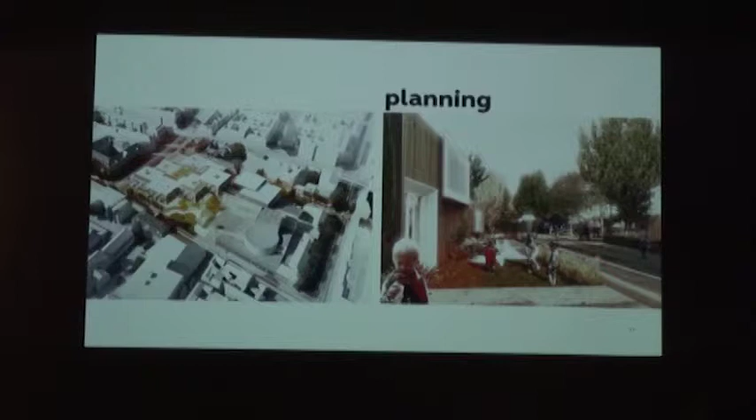And then we do planning. We do some very big scale planning projects in different places in the world. But here it's from Norway, where we're doing a neighborhood center, a small place, and then we're doing some social housing in the northern part of Denmark, where it's about taking the whole area into consideration.

We work a lot with sustainability. We started this 8 years ago in the office, and now it's a separate department. We focus on daylight and energy, because for us it was difficult to take the whole package of sustainability in. It means we are using daylight the artistic way in one sense, and then with a more technical and research-based approach on the other hand. And with daylight we have a strong tool to do a lot.

The reason why we're doing energy - I don't know if it's so important here because you have so much oil, but in Denmark we don't have that much, and energy is terribly expensive. So saving energy is really saving running cost, and you can add that to capital cost for a project.

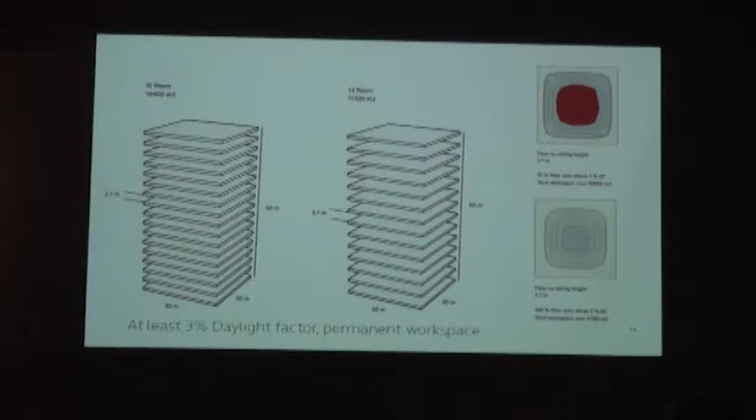This is a diagram I did for a contractor in Holland. They were asking for 16 floors, about 14,000 square meters, with workspaces in the perimeter of the platform, 30 by 30 meters. Quite simply, by looking into our research, we could see that by utilizing the whole platform - meaning you can have workspace all over - we could reduce the number of square meters by having 1 meter more floor to ceiling.

And this all comes out of a rule that is more and more being executed all around Europe, that says you need, at the moment, 2% daylight, but in the coming new rules, 3% daylight on a permanent workspace. That means at any time of the day, the daylight represented outside needs to have 3% of that inside on your workspace. If you can't prove that, it cannot be a permanent workspace.

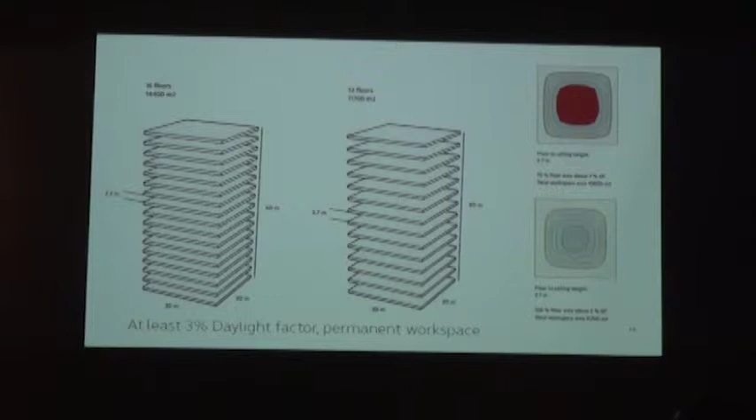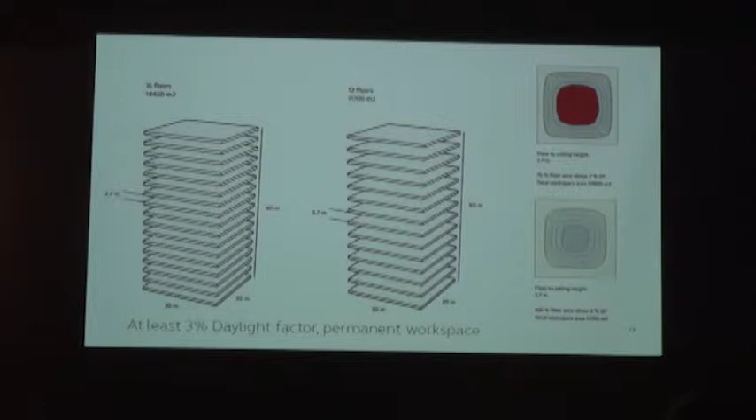I know for people working in cubicles and stuff like that, this is not good news, but it's a reality in Europe. It means that for a lot of organizations, universities, or pension funds owning this kind of building, you can have buildings that are totally outdated - they cannot be used, they're not efficient anymore because they cannot provide the 3% daylight as they should within the next year. In 2015 these rules will be implemented, and I'm sure it will also come to this continent.

We have a work method in how we do stuff, and the reason for that is we have to be able to communicate with clients and users in these processes when we work together, but also because we have so many people sitting in different positions around the world, so this is important. If you look at it, it's terribly banal, and it should be like that.

We have a data collection and analytic exercise, and then we put in what we call a strategic concept. If I were to do a competition for a university building in Europe today, I would get so many pages in binders talking about what this building should do. If I carefully read all of that, it shows very precisely that you cannot build anything after that, because it's counterproductive, it goes in all directions. That's because you have so many user groups, management, facility management, and they all have a say, but nobody can go in and make these prioritized choices in that material. So what we do is boil it down to one page, or let's say 5 paragraphs, that represent what this is all about.

And if it's not a competition, and often it is, because 85% of our jobs come through winning competitions in our firm, but if we are with a client, we present that to the client and say, you came with all these binders, but in reality, these are the 5 most important issues to be solved with this design.

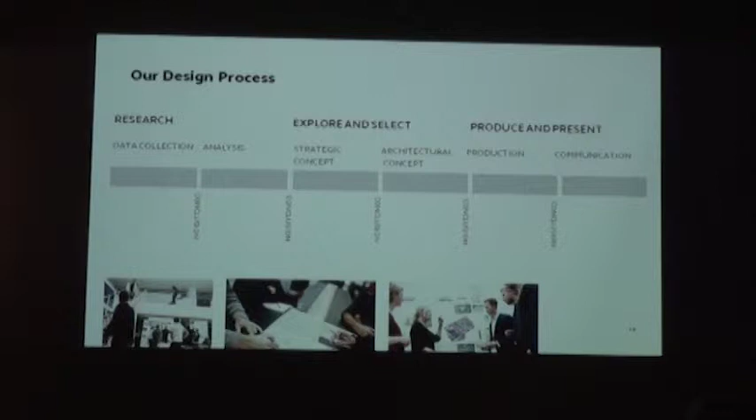Yeah, now to the projects.

This is a university building we opened yesterday in Denmark, a faculty for economics, for studies in economics, placed in the southern part of Denmark. The strategy here has been to make a building where you come as a student, the first day when you enter your institution, and you get a view over the whole offer. What is the offer they can give me? What can I do here?

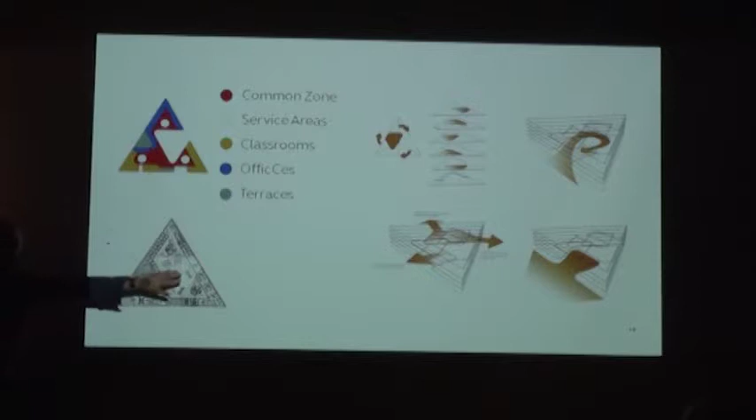So by coming in at one place and having a kind of revolving or turning atrium, we open up clearly. So you come in here - this is just a couple of months ago - come up, and you follow all the way to the daylight. So there's a progression as you come up.

And this is all informal study places. We very much divide our spatial organization between the formal learning and the informal learning.

There's 3 steps in learning. One is to go to a lecture hall, then you go out and discuss with your fellow students what you saw, and the third step is the possibility to activate it, to go back and explain what was happening. We are deliberately creating these informal spaces, because in a brief you always get the formal spaces but never the informal spaces, and we have to fight for these square meters. So we have this kind of space - you sit here today, this is formal, maybe not learning, you could say entertainment, but it will then lead to learning.

And when you walk out there, you will start to discuss something. You need a place to sit, an area to be, and this is important. So coming out of the lecture hall, you can come to these more intimate spaces that interlink with the bigger space, which interlinks with the very big space going all the way to the main entrance.

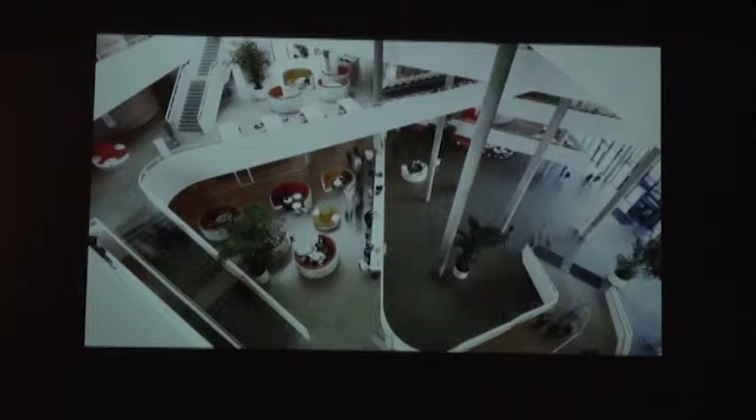You see how you can look down through this connection. We are also creating outdoor spaces.

Climate change has been good to Denmark, at least for the summer. We have longer summers than before, and people really enjoy getting out. In the wintertime you also need to get out to get some daylight, basically.

Then the facade. This is a very sustainable building. We are using approximately 30 kilowatt hours per square meter per year here, which is a very low energy building.

The solar protection on the facade is a system of louvers that can open and shut automatically. So the building changes as the sun turns. As soon as the sun is away from a facade, it opens up totally, then closes down and opens again. You can of course oversteer that to get this kind of motif.

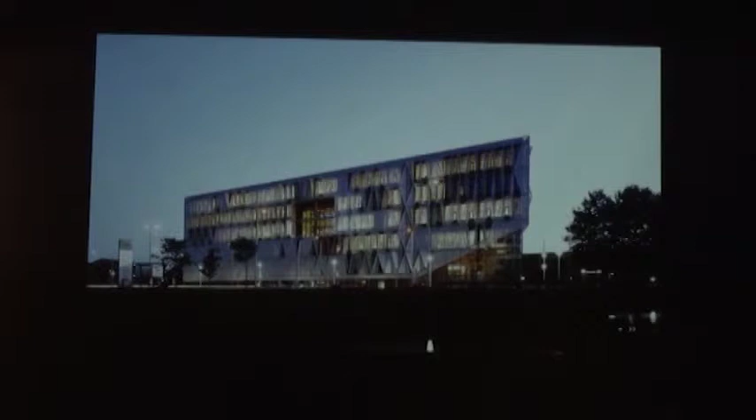This picture is a little false because it's made for the photographer, so they shut some and had some open to make this pretty picture. In reality, the facade will be more or less closed in one direction if the sun is on.

Another project is in culture, a very different scale also. 16,000 square meters, what is that? 160,000 square feet.

Situated on a green field outside the provincial city of Aarhus, it's for archaeological findings in the ground. In the competition, we worked with the idea that you just open the lid to the excavations down there. It was a very simple scheme, and I think you will like this simplicity. It's all attached to a very big mansion, a farmhouse or farm in this area, which is also a museum, and this is on top of a hill.

So you overlook the sea, the Baltic Sea, leading to Copenhagen. Inside, it's all about how you will be slowly moved into the earth, into the excavations. We're using a lot of daylight up top, and as we go further and further down, it gets darker and darker and more focused.

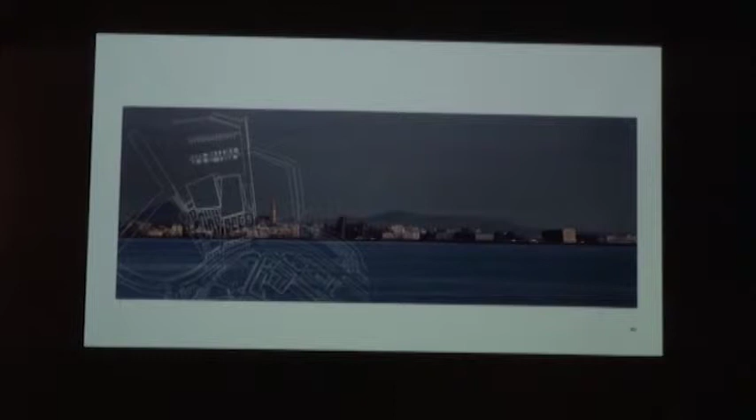This is Reykjavik. We're placed here. It's an extension of the city of Reykjavik to a harbor area, so it's also a regeneration project.

And then the rest of all of this is kind of public accessible areas. They're not programmed in reality, but they are the areas where you can invite people in without tickets. Because this idea that culture becomes so expensive that you can only pay €100 or $125, even more, maybe $150, to get in for an evening - that is a lot of money, and many people could have good use of these places without that kind of fee.

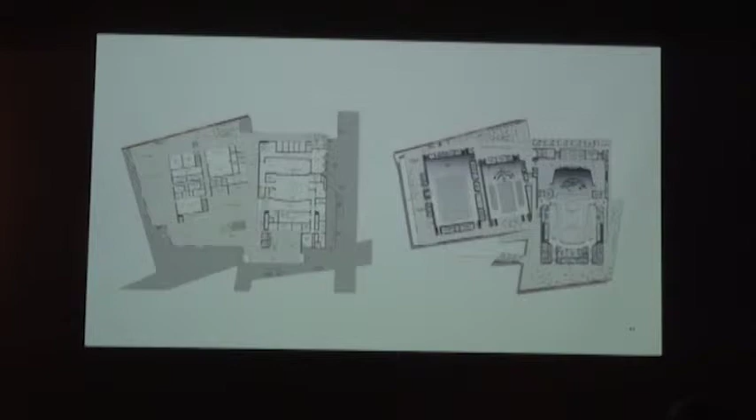But it also somehow gave us an opportunity to work with this extreme situation design-wise. You can ask yourself what kind of building would resonate in such a climate or in such an extreme situation, because it also goes the other way. In the winter time, the sun comes up like 10:30 and it goes away like 1 o'clock, which means you have a relatively short day, at least if you want to be up that day.

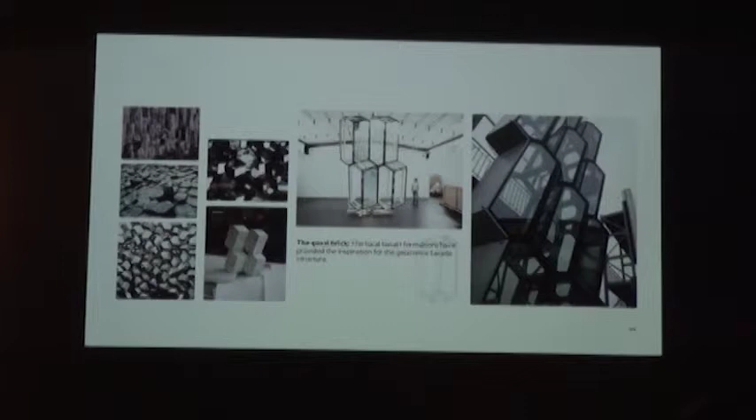Inside, we created these very big and lush spaces where the daylight kind of floats in. You see the different colors on the glass. We work with clear glass, colored glass, and mirrors. It's a kind of transparent mirror, but it is kind of mirroring.

And that facade also changes totally with the sky. The reflections of the sky and the colors go directly into the glass as such. And in a way, the building almost breathes like a human being over the day and over the year.

This is a kind of front facade shot, and you see it creates this very intriguing pattern, interesting because it changes due to the sun angle hitting it.

We worked a lot with the opening, as I talked about before, the invitation to the city. So at ground floor level, we have a lot of doors opening up, and at daytime, you can just come in. This building is used for concerts, theaters, computer festivals, car exhibitions, folk dance.

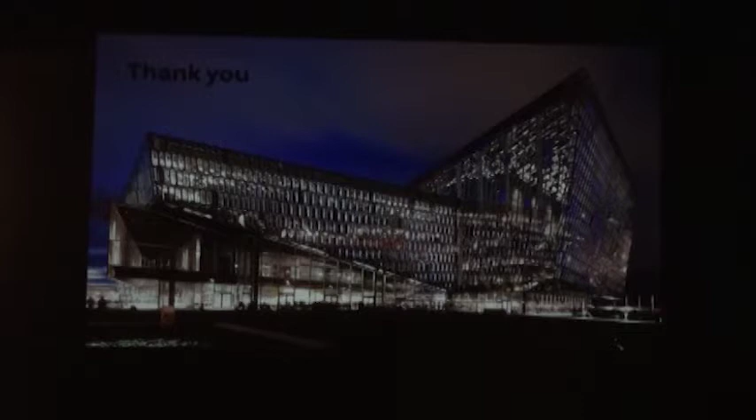Coming to this time, September, you start having these long afternoons, and the building totally changes its appearance on the outside and the inside. Then in wintertime, it becomes a beacon. It reverses totally—it becomes a destination in Reykjavik you want to go to, because it's almost dark 20 hours a day.

Last year, in 2013, we received the Mies van der Rohe Prize for the building. Of course, we are immensely proud of that. Thank you.

Thank you, Louis. It's a difficult building to come after, but I'll try. The buildings we do are a little different, but the connection between me and Henning Larsen is that I had my formative years in Henning Larsen's office, working with Louis and others who came out of the School of Aarhus. We were together in the first five years in Aarhus, and afterwards we worked with Henning Larsen.

So the office is very important to me. I formed my own office 15 years ago, and we are 30 people, which is not as big as Henning Larsen. We also do smaller buildings, mostly culture and educational buildings, but also some commercial and workspaces. Right now we're doing the global headquarters of IKEA.

I guess most people know IKEA. They're doing a new global—we're not supposed to call it a headquarters, because the headquarters will always be in Älmhult—but it's in Malmö. It's a global meeting center and workspace.

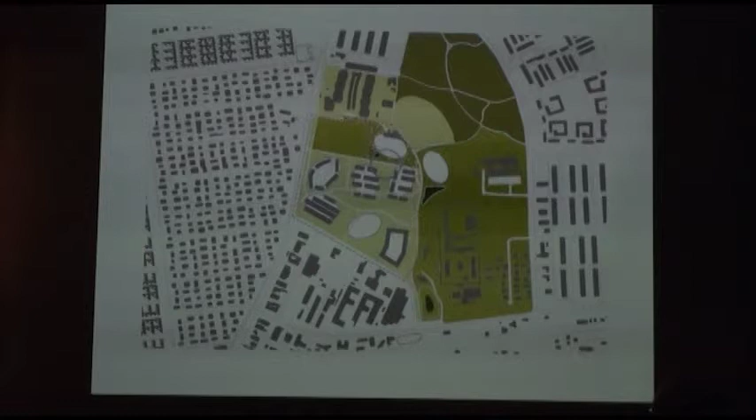This is a very small project, in a suburban setting right outside Copenhagen—a small neighborhood center, a tiny cultural house, in this kind of social democratic setting. As you can see, there are lots of detached houses but also social housing around, and in these areas they have a tradition of having these small cultural houses.

This was a competition, and the development was quite new, so there were no end users yet. Part of it was to rethink the program for a traditional cultural house, which was mainly made as a space you could rent for parties on a Saturday evening. By doing that, you would actually privatize these small cultural houses that are supposed to be for everybody and create activity in the area.

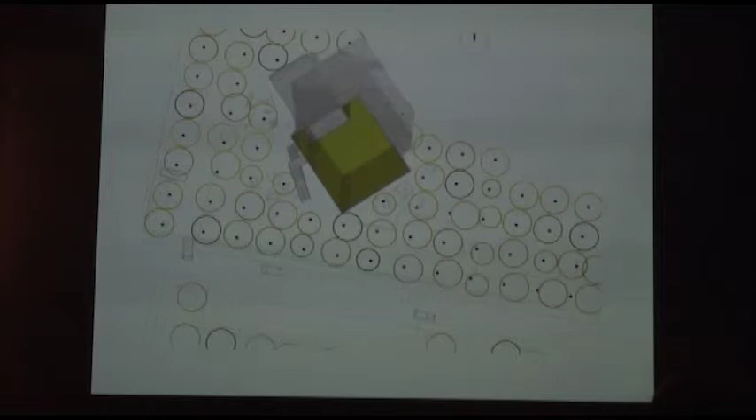The site we were given in the competition, as you can see, is quite small, and the idea was to create as much activity during the day as possible in this small house, by stacking all the activities and connecting them with a staircase in the back.

You could use every space separately, but you could also combine them. As you can see here, all the activities we imagined could be going on here, from skateboarding to making dinner for your friends and bringing it back home in the industrial kitchen at the bottom.

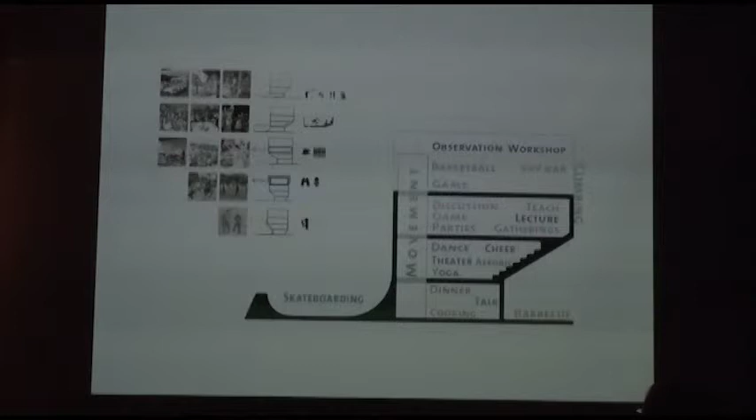You can also open that up as a kiosk, and you could be outside in the summertime. We have a small auditorium, a small multi-purpose space, and a basketball field on top, which is also an outdoor bar mainly in the summertime.

Of course, energy is a very important issue in Denmark, and this was 2008, when the requirements were strict but not as strict as now. We wanted to reduce energy consumption by 30%, but we actually halved it down to 40 kilowatt hours per square meter, which at that time was quite low.

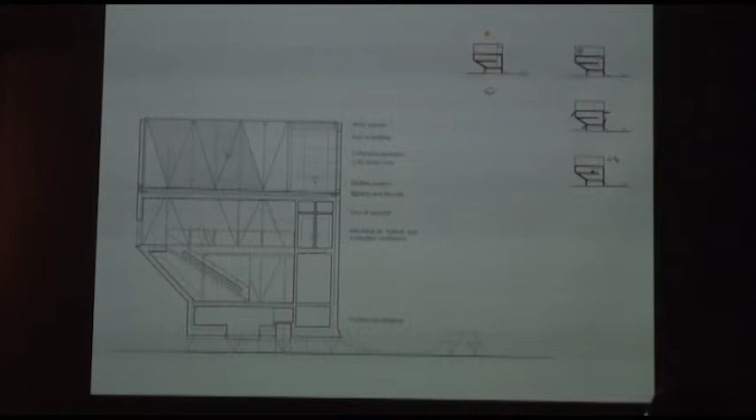We did that by using all different kinds of technology, but also by being low-tech, having natural ventilation controlled by sensors, geothermal heating, and so on. So this is how it looks like.

It shows the stacking of the activities. It's aluminum cladding, which is also a passive solar screen from the big windows—some is perforated and some is not.

As you can see here, you have the staircase leading to the first floor, to the auditorium, which you can combine with the multi-purpose space or detach. You could also enter on the ground floor and, with a small staircase or an elevator, get up through the houses. And this is the daytime view.

We have this climbing wall here that is very much in use with instructors, and we have this skateboard ramp, and the basketball field. And you have, of course, the indoor activities.

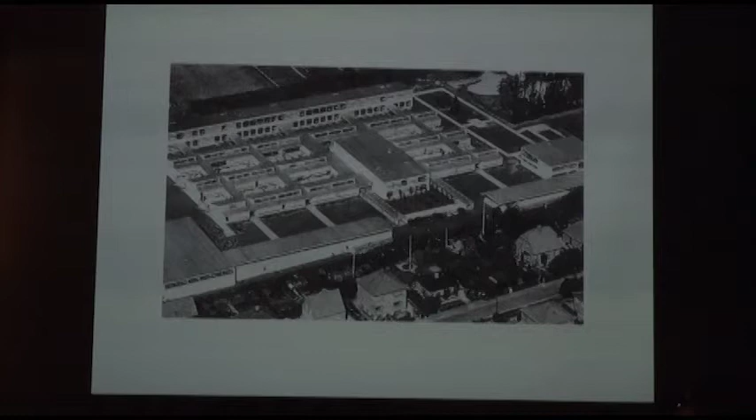This is the full school. As you can see, you have these classrooms with the small courtyards in front. Actually, you have a twin classroom and a twin courtyard, and it's kind of very structural—you can continue this structure forever if you want to. And it's all connected with these hallways only going in one direction.

You have the specialized classrooms here in the back, and you have the central hall, which at that time was used mainly for gatherings. In the morning there was a tradition - I don't know if you have this here - but you would meet in the morning and sing a song, then go out for your classes. You don't do that anymore. So this full space was kind of empty, and in a way it was an empty heart in the school, with no activities.

The reason we got this assignment was that in this municipality they were changing all the schools to facilitate new ways of learning, which is much more project oriented, and also in need of a lot of different space types. You need to be able to go out with a group to work together, or to work individually, or with larger groups. In that sense the school was kind of old-fashioned, because you only had these classrooms and the specialized rooms.

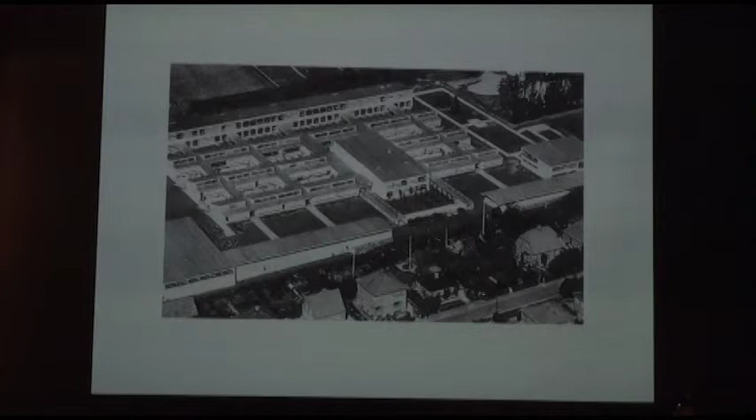So the municipality worked with two architectural firms to try to restructure the school, by covering some of the courtyards and changing the whole structure, which was kind of a tough way of working with this beautiful piece. Fortunately it was federally listed, so the cultural minister in the end vetoed this refurbishment or reconstruction of the building. Since the client wanted to use it, they asked us if we would like to try to look at the school and, by doing less, still facilitate the new ways of learning. I think we were very lucky to get this assignment, and we're also very intrigued by getting these kinds of assignments. We like challenges - that's what makes us happy, you could say.

So the initial work was mainly to try to reprogram the school, to see if we could find a way to use the same structure but in a new way. What we initially did was use the after-school facilities, which is part of a Danish law - you have to provide after-school facilities for children until their parents are able to pick them up. By reusing the same square meters inside the school and in the after-school facilities, we could somehow get more square meters altogether. By opening up between the two classrooms with a sliding door, making these kinds of small changes, we could still use the same structure but in a different way.

Then we moved the library, the mediatheque, down into the assembly hall to recreate the heart of the school. And then we suggested that you could actually make a supplement to the very strict structure of Arne Jacobsen, but doing it underground.

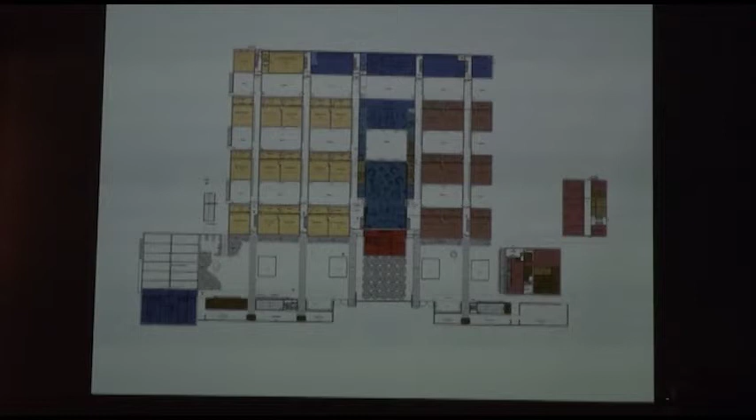The idea is that you have two parallel walls that make a supplement. You don't change everything, you only change something, and by doing that you can add new spaces to the old structure. So this is the old schoolyard in '56, and by defining the asphalt or the ground as the limit for the listed building, we worked with overground and underground structures. If you're on the other side of the listed line, we worked with the Arne Jacobsen proportioning and also the detailing.

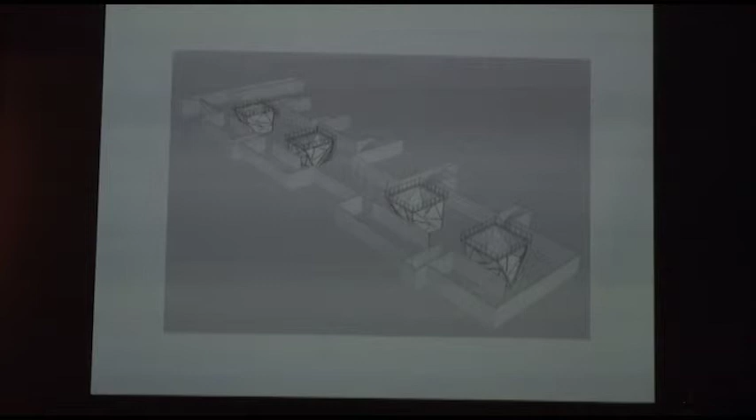So this is half a courtyard in the proportion and also in scale. Then you can twist that geometry when you go underground, because underground you're not on listed grounds anymore. By doing that we could create this underground space, which is much more fluent and has a totally different scale than the Arne Jacobsen structure. By adding these specialized facilities, we could also save the old building from having ventilation ducts and so forth, which really isn't possible in this kind of very defined structure that he did, and also the detailing.

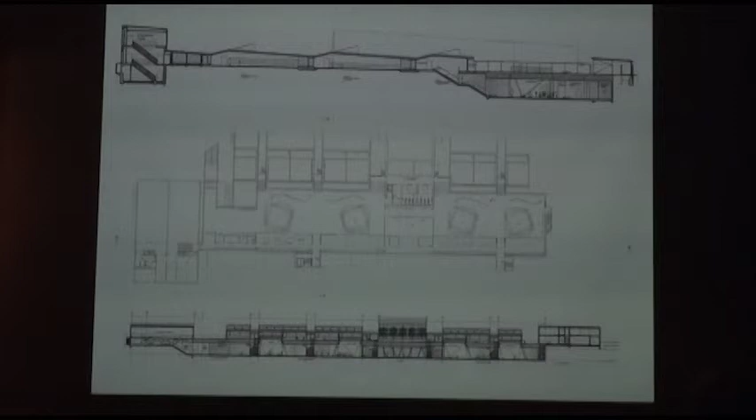So mainly the underground plan looks like this: you have this very large fluent space around these light courtyards. You have these spaces that require ventilation on this side, and you have glass walls that can open up to the big space, so you can have this kind of large laboratory or project space that you can use together with these specialized spaces. And here you have the sort of famous Arne Jacobsen hallway, which is a classic architectural move, you could say, where you really have suspense and you open up the spaces in this rhythm. Then we connected that to the new extension underground, and by doing that we could also connect the school this way.

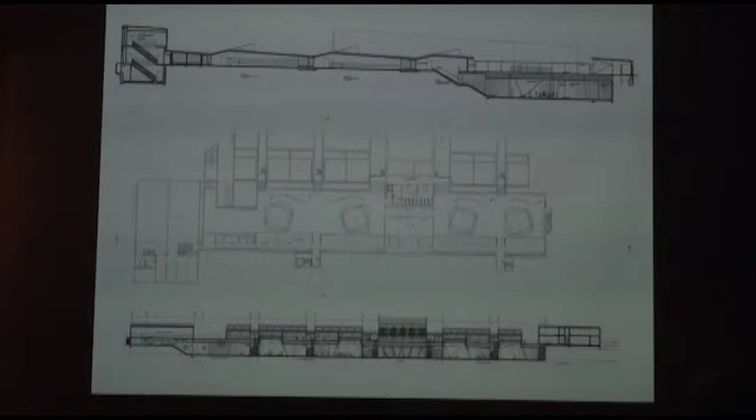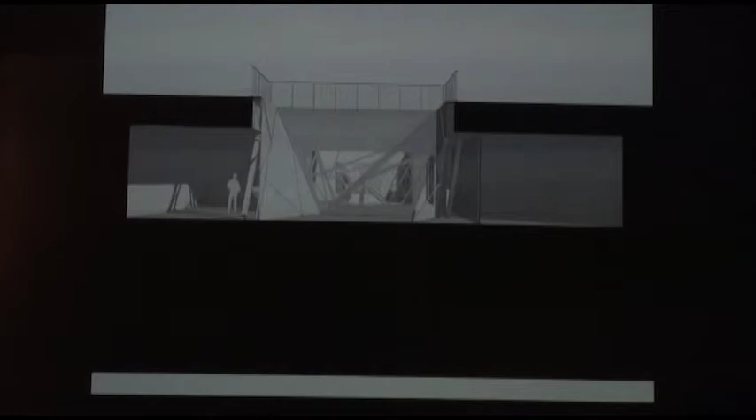Of course, it's difficult to build underground and still have daylight. You heard Louis talk about daylight, a very important thing, and the parents were very nervous about putting their children underground. So our main strategy was that the underground building should be much brighter than the building above ground, and we should have this feeling of going up into the sky when we move down. So we studied light in models in a light laboratory, working a lot with reflecting surfaces to ensure we had enough daylight down here.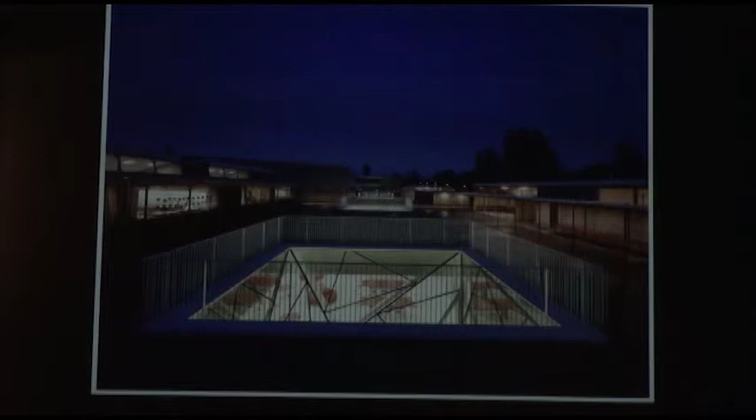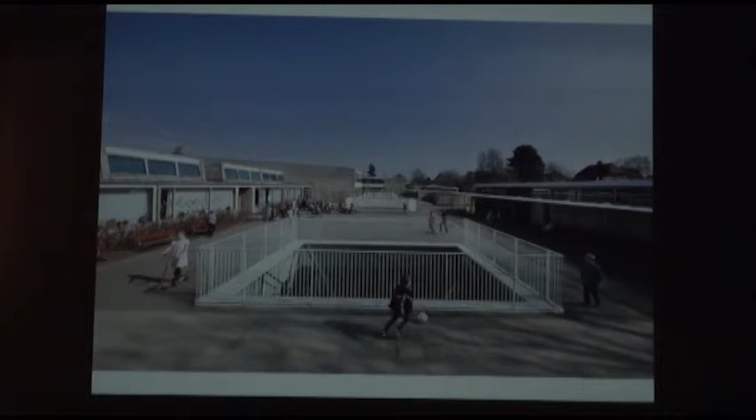The restoration is, of course, a whole other story of the existing school, bringing back the old colors and so forth. When you move down, as you can see, you have these classical proportions, and as you move down you get a different kind of space.

Inside, we used white concrete to reflect as much light as possible, and it is very bright down there. The main construction is steel, with secondary construction for the windows - and here we're looking up towards the existing school.

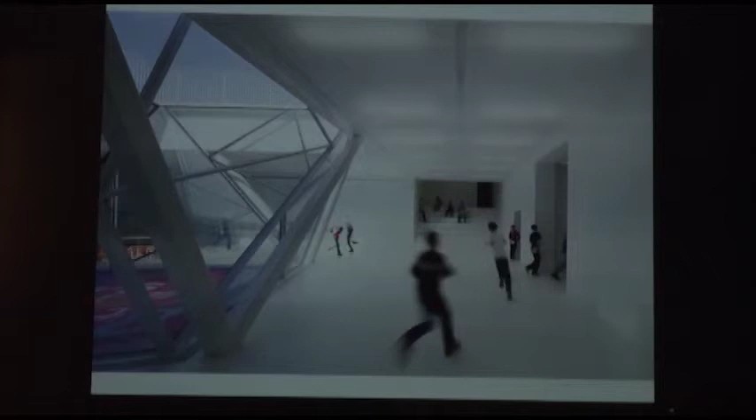All the hallways are connected with these small auditoriums or stairs, so you can have informal lectures with the children, and then work in the bigger space - or you could work inside facilities like physics, chemistry.

There's also a physical education space, a biology space, and a school kitchen in these smaller spaces. You can open them up and work like this guy sitting outside studying, while mainly the lecturing happens... well, I don't know the word in English.

So you use these courtyards for experiments - especially the physics class used this a lot for different experiments.

A school kitchen for everybody to use during breaks, and in the afternoon you can come down here and use it for project work too. If you're studying Chile, you can make empanadas here, or whatever. So the idea of this big space is more like one big project space, one big laboratory for the whole school to use.

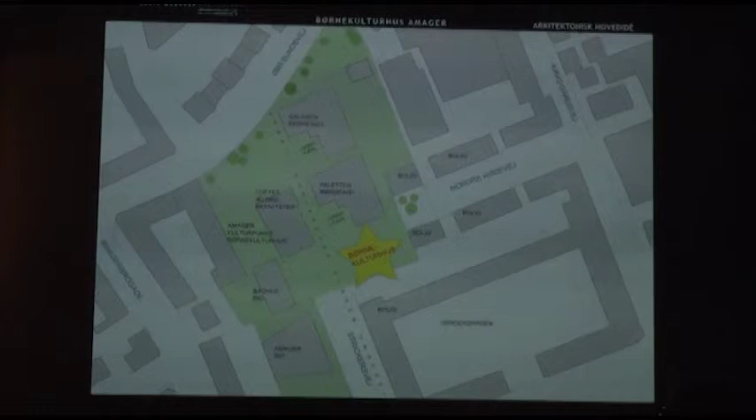This is a site actually under construction. The border of the site was here, and here you have the rest of the cultural buildings. Here's the cinema.

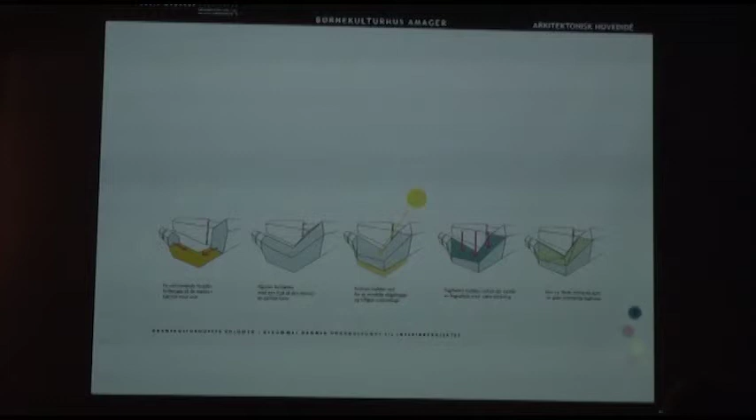The idea was to get as much square meters out of the site as possible, but still taking care of the neighbors. So by connecting the two very different scales from the 6.5 story building and the 2.5 story building, and pushing down the middle of the shape to ensure we could get sunlight and daylight into the neighboring buildings, we created this kind of envelope that could contain the children's culture house.

It's a very complicated house, spatially, and the idea is that you can always orientate yourself when you get into this low part, and you're able to see all the activities going on. By doing that, you can make a choice and choose to go to either side.

One of the sides here is mainly workshops where you do dance or art, and they're enclosed acoustically, but you can always look from one space to the other—so you can see from this space up here all the way down to the entrance floor.

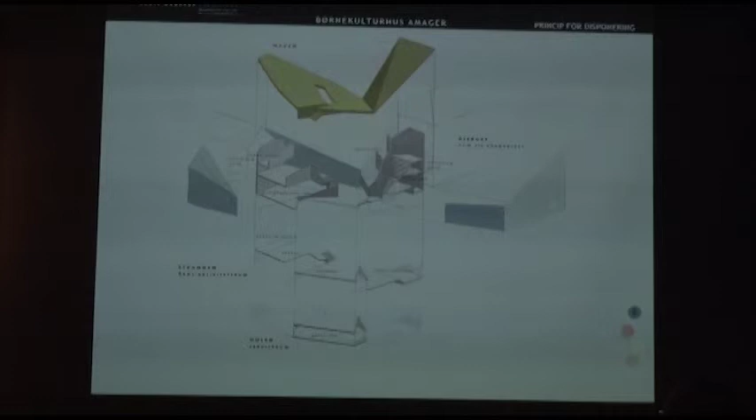The other part of the building is more open. It's for the performing arts, and you have a performance space down here that's dug down half a story. You have an open cafe here, and smaller spaces for the children further up here.

This is kind of the inside. Everything is connected on one side here, called the mountain, by a big staircase, which is also a gallery where you can exhibit your work. And you have a multi-purpose workshop here, plus two smaller workshops where you can either do dance or art.

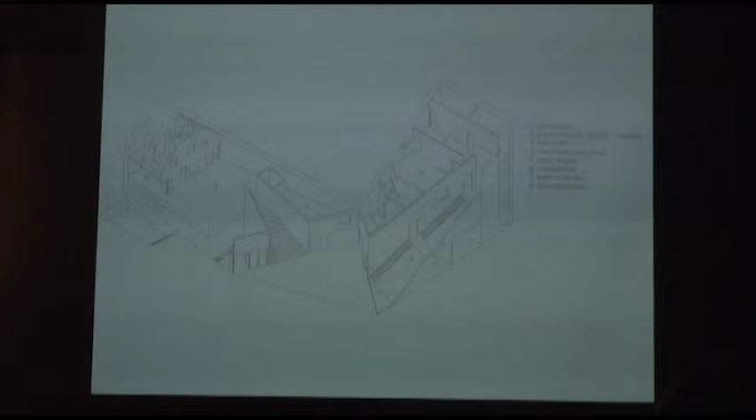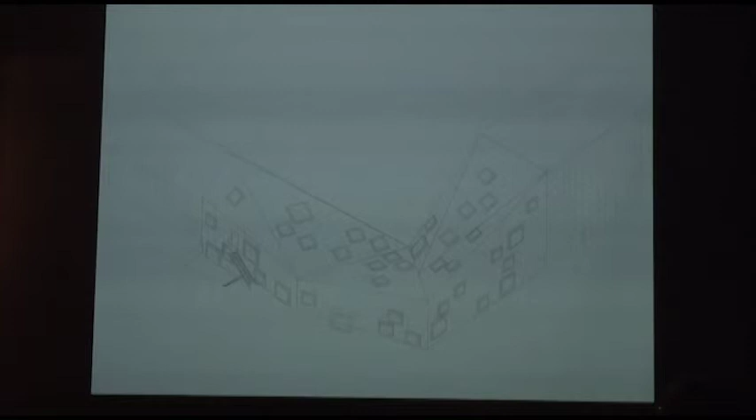It's all enveloped by the same skin, so you have these deep windows, which are kind of spaces in between inside and outside, towards the sky, of course, but also towards the outside world. The idea is that these deep windows can be inhabited, that the children can change the inside of it and actually inhabit that for a while. So you can sort of privatize the skin in between inside and outside, but only for a while, of course.

This is the connection. As you can see, there's a lot of buildings around it, so it's difficult to kind of overview the whole building. Here's the roof line going down into the workshops, and here you have the kind of scale connection between the existing building and the new house.

Here you have the deeper windows, and you can see this is actually the children's work. You can take the lighting out, change it, and put it in again.

This is called the beach—it's kind of the entrance space, which is changing all the time. You can kind of shape it. If you have a project here, a project for the whole house, you would kind of shape this space. So this is changing all the time, but mainly it's kind of an empty space that you can fill up with different stuff.

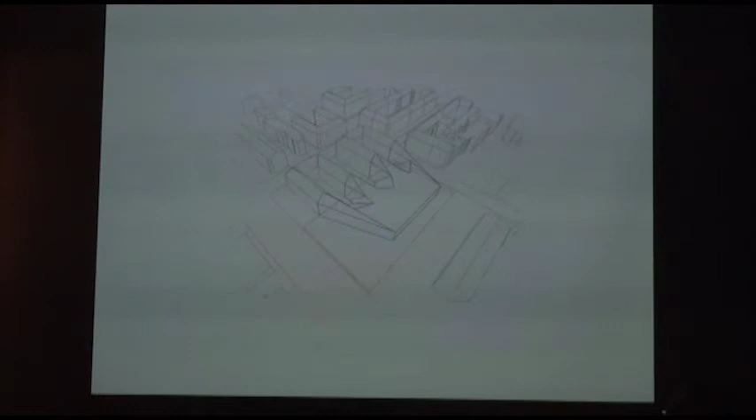So what we did was to define the field and the program. This is the handball field, and the gables that we characterized as being very special. What we did was to look at the light conditions in these backyards. This is west, so to ensure that the western sun could get into the backyards, we connected like this, and then we merged the program and the gables.

By doing that, we got this three-dimensional building site. We could say you have this kind of big covered field, big covered space that you can use for many different things. So it's mainly kind of a covered outdoor space.

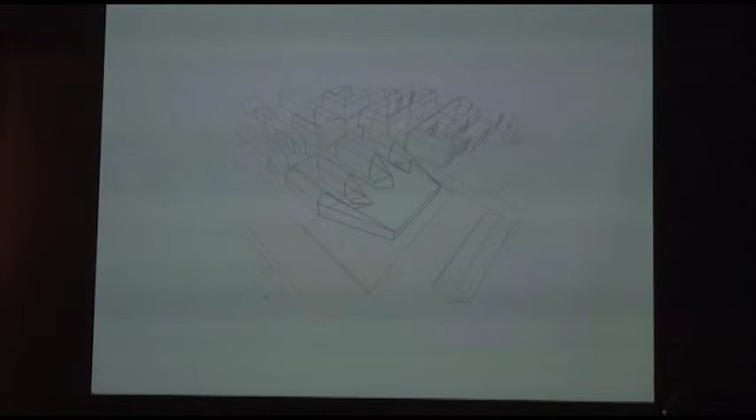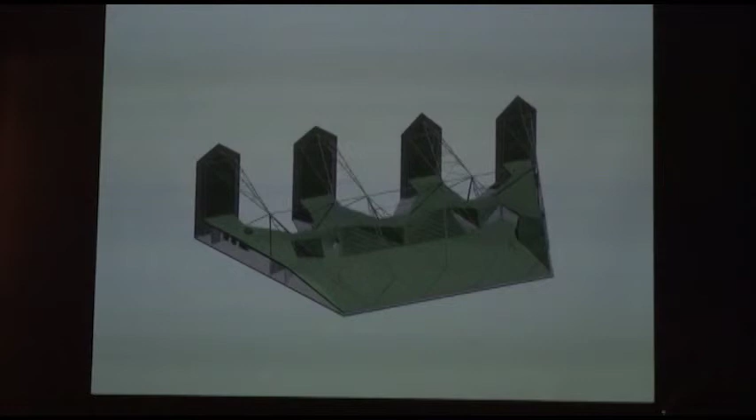This is the field underneath. The feeling of having this outdoor space we enhanced by folding up the grass, and by doing that you had connections to these surfaces here and to the big field here, and you could provide for enclosed facilities underneath.

Polycarbonate is a nice and very inexpensive material, but also it's transparent. We found it was very important that you had this. If you had a covered field, you also have daylight. Nobody wants to go into these sports halls that have artificial lighting, especially in the summertime. We want to enjoy the long evenings.

So this is another project, but the qualities of polycarbonate are very obvious, with the transparency and the shadows. You can see what's going on behind it, and you can see the light inside it.

This is the primary construction in steel, which is minimized, as you can see, and the secondary construction in plywood, which is also quite inexpensive. And here you have the cupboard.

We had a lot of fights with the sports end users because they were used to daylight being a bad thing in a sports hall, since you could get blinded. But of course, since you don't have much contrast, you don't get blinded. So it's actually possible to do sports in daylight, as you could do outside.

But also inside you can do that. And this is how it shows in the evening. So you have this kind of attractor, you could say, in the street. It's open from 8 o'clock in the morning until 10 o'clock in the evening, and in the winter time it's quite important that you have this kind of attraction.

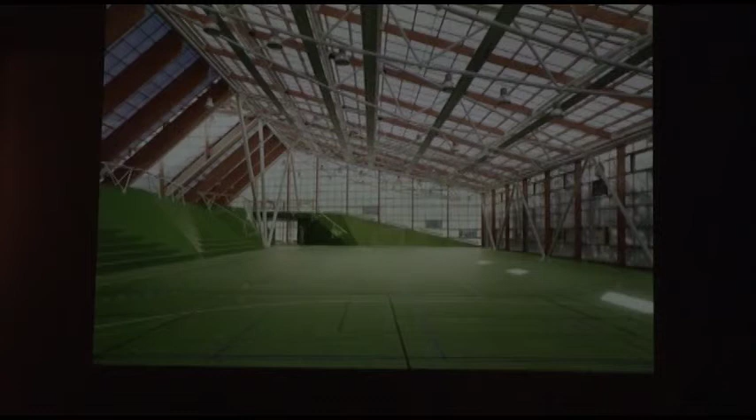This is not a competitive sports hall, it's more like a gathering place. It was important to us that you can connect the two streets through this hall, and you could also leave your stuff there if you don't want to change clothes, and still do sports.

The idea is also that when you get more money, you can build in the 3 dimensions, going up into these towers. You can put in decks and enlarge the amount of square meters, and we already have a project doing that.

And as you can see, you don't get blinded by the contrast because there is not much contrast between outside and inside.

Yeah. That was a mistake.

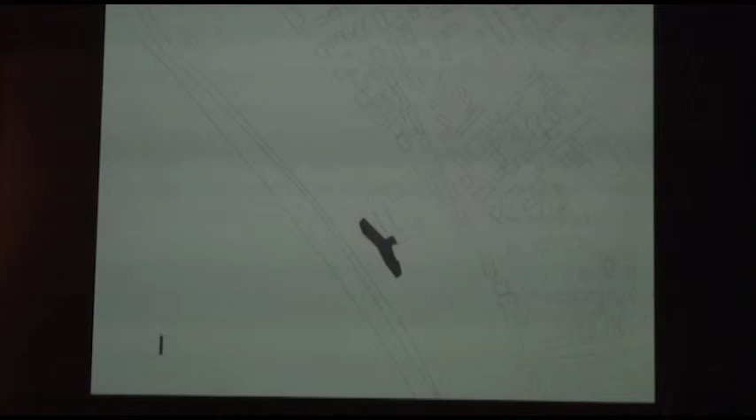Very fast, small project in Sweden, a kindergarten on the beach, right across the sound from Copenhagen. Of course, the site is listed, and it was a very difficult site to work with because the neighbors were really angry that something had to be built there.

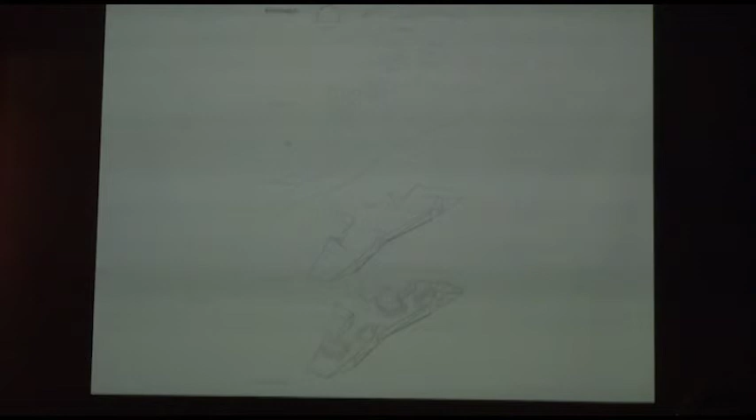But there was a building site, so the client wanted to have this preschool connected to the existing school. The idea is that we try to understate the building as being a building, and we work with these small fishing huts that you have all around the small city, and the landscape. By merging the two, we have this kind of understated landscape on the beach.

And this is how it looks like. In the evening, you have these small fishing huts, or a typology like that, and this is the kind of landscape.

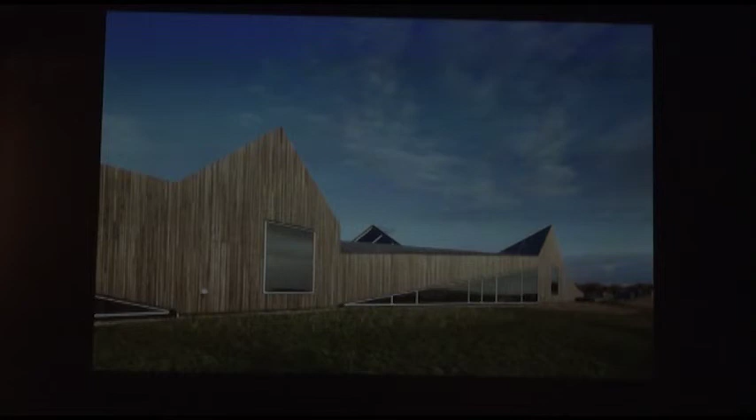And it's clad in Robinia, which is a kind of sustainable tree that is very small, so you can only use it in small sticks, but it's extremely hard, and very robust towards water, so it has the same abilities as teak, but it's grown in Europe.

The playing field here is kind of dug down, and we put the landscape up here, so you can't see it from the outside. It's more like a floating landscape, and this is merged into that.

Nice view from the roof. The intention was that the public could actually use the roof, but the client thought it was too risky. But actually now I see all the skaters up there without any fences, so maybe this is more dangerous than actually having a public route across the roof.

This is the inside. The idea is that the fishing huts are defined by these open but still acoustically closed shelves. Every group is defined by this little house, and all the spaces in between is common space for everybody.